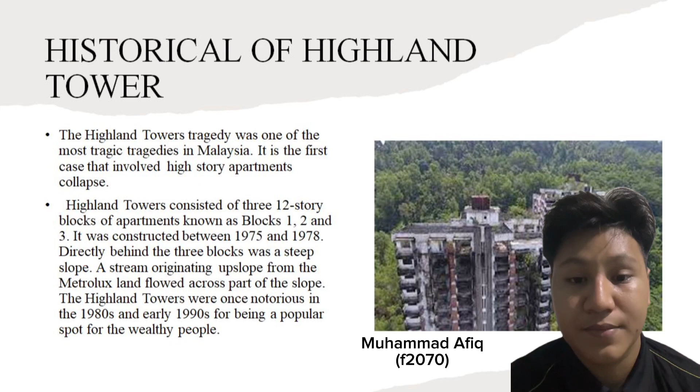For the causes of the tragedy, in general there are many factors. The tragedy happened because, firstly, construction of a building on the edge of a hill is not suitable, especially in the equatorial and tropical climate with high rainfall.

Second, building apartments on the hillside also goes against the Land Conservation Act 1960. The Act prohibits development carried out on the hillside had slopes greater than 18 degrees, for reasons connected to the environment.

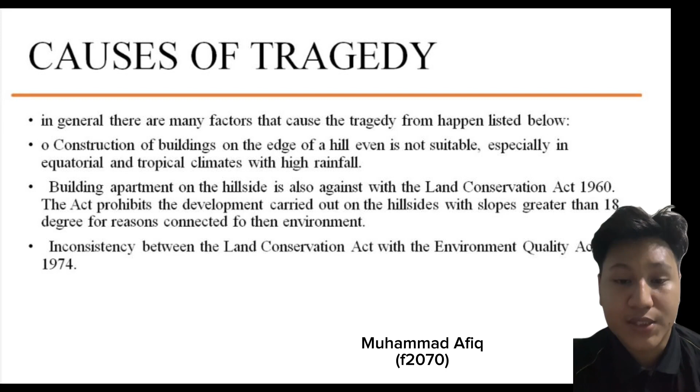There was inconsistency between the Land Conservation Act and the Environment Quality Act 1974. On December 11, 1993 at 1:35 p.m., the first tower of the Highland Towers apartment complex in Selangor, Malaysia fell, ultimately killing 48 people.

The cause of failure was attributed to a landslide that occurred due to pipes bursting, allowing the barren ground near the site to wash away. The pipe system was originally placed on a hill nearby the towers to divert water from a stream that normally flowed onto the site. Trees had also previously been cleared from that hill for a separate housing development project, so the soil had no protection against erosion.

During a 10-day monsoon, the pipes burst from the large amount of water flowing into them, letting that volume of water flow down the hill. The combination of monsoon rains and loose soil led to a landslide that brought Block 1 of the Highland Towers down with it. A mass of mud equivalent to 200 jumbo jets, around 100,000 cubic meters, came sliding down the hill, breaking retaining walls and finally destroying the pile foundation system of the tower.

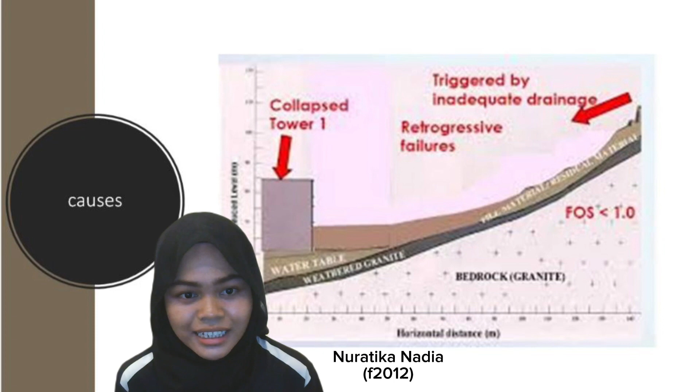For the implications of the tragedy that happened to Highland Tower: about 48 people lost their lives, and all have been discovered and identified. The victims were mainly Malaysian, with 12 foreigners, including British, Japanese, 2 Indian, Korean, and lastly 3 Filipino and 3 Indonesian.

This caused loss of property worth millions of ringgit, and a review of environmental acts by the authorities. It caused serious damage to the environment in the affected area. The possibility of public acceptance of hillside housing will decrease, and this raised concern among developers regarding environmental damage to surrounding areas and the amendment of existing acts related to the environment.

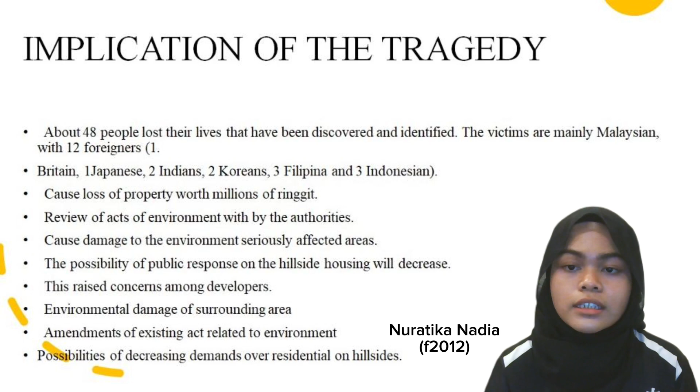Lastly, there are possibilities of decreasing demand for residences on hillsides. Construction of buildings on the edge of a hill is not suitable, especially in equatorial and tropical climates with high rainfall.

Building apartments on the hillside is also against the Land Conservation Act 1960. The Act prohibits development carried out on hillsides with slopes greater than 18 degrees for reasons connected to the environment.

Another outcome we learned is that it was not proper to join a drainage pipe of the Bukit Antarabangsa project, which was under construction, with the pipe of East Creek water stream, made to bypass the water from Highland Tower.

In conclusion, in spite of years of accumulated experience, the ability of geotechnical occupations to express reliable calculations for slope failures or stability remains poor. This is mainly due to the abundant sources of doubt that affect performance in geotechnical engineering. Essential natural unpredictability of soil properties, lack of data, limits of models, and above all human error are some of the challenges that geotechnical engineers have to bear routinely.

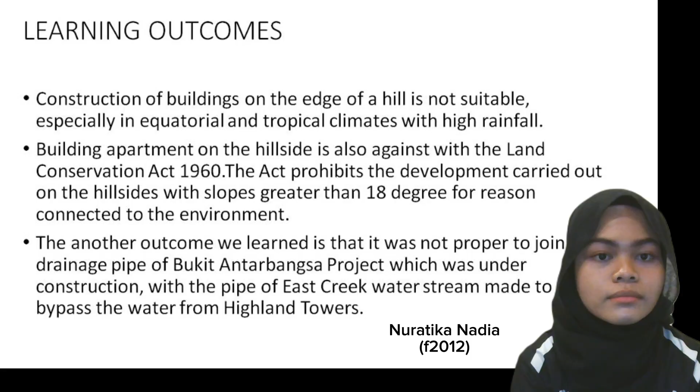Hi, my name is Najwa, F2047, and this is for case 2, which is fill slope in Putrajaya.

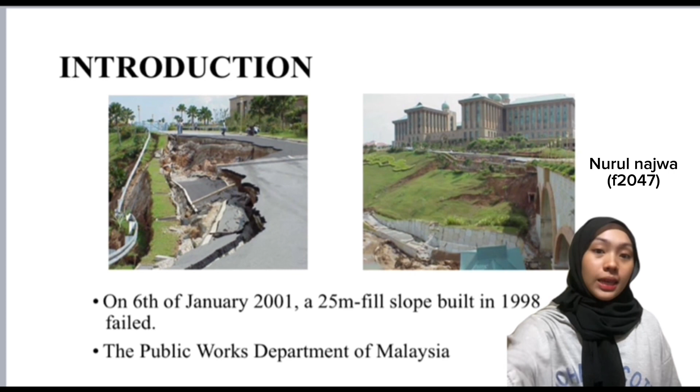On 6th of January 2001, a 25-meter fill slope built in 1998 failed, following an overnight period of significant rainfall. The breakdown resulted in two reinforced earth walls failing, the newly finished jetty and boat docking facilities at the bottom of the fill slope collapsing, and a portion of the road at the top of the fill slope collapsing and cracking.

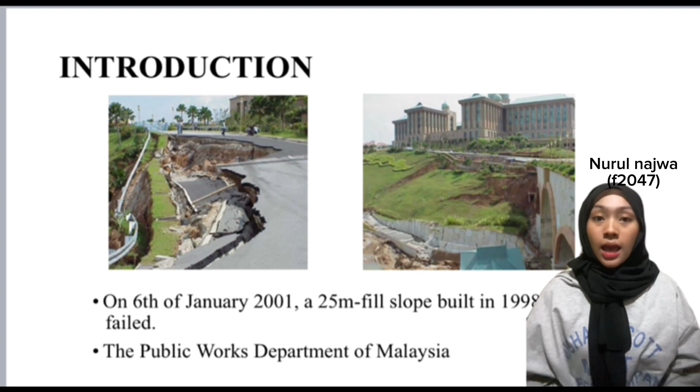The Public Works Department of Malaysia was then asked to investigate the failure to ascertain its scope and root causes. This case provides an overview of the work done during the field inquiry as well as the study's conclusions, and then corrective actions were recommended.

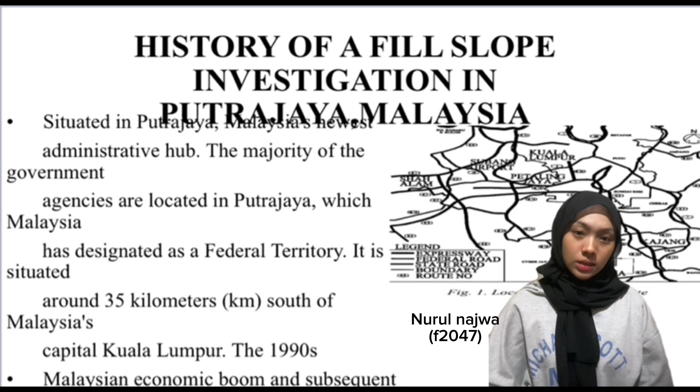For the background, this case is situated in Putrajaya. The majority of government agencies are located in Putrajaya, which Malaysia has designated as a federal territory. It is situated around 35 kilometers south of Malaysia's capital Kuala Lumpur. The economic boom of the 1990s and subsequent rapid growth led to the development of the Putrajaya region. Even though the majority of government buildings in Putrajaya have been finished, construction is still ongoing.

We will explain the cause of the failure. The cause of failure can be attributed to the following reasons: the discovery of a thin layer of pliable clay that was pressed out during the failure. The fill slope may have become unstable and settled as a result of this soft layer.

Second, the presence of loose material, which suggested good compaction during construction may have prevented the material's current state, which was caused by water seeping into the slope and loosening it.

After the lake was filled with water, the groundwater level in the failing slope increased. Compared to yearly measurements taken before the fill slope moved, the groundwater level rose by around 9 meters due to the factor of safety decreasing from 1.051 to 0.935 using anticipated soil conditions. This has made the slope unstable.

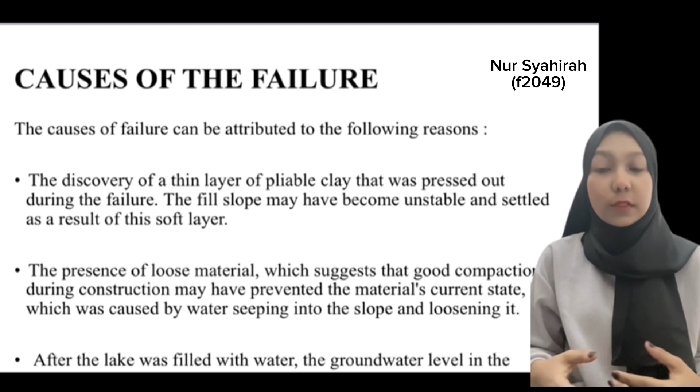Back analysis of the fill slope was carried out using the slope software, Slope W. The back analysis was carried out for two cases using typical soil parameters used in Malaysia: first, the fill slope prior to the construction of the lake, and second, after filling of water in the lake.